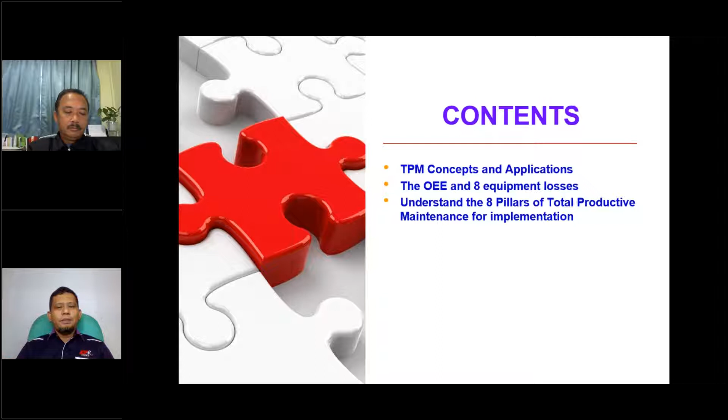Right. So in total productive maintenance, we have the keywords here. The first keyword is total. What is total? Later we're going to share about total involvement. When we use the word maintenance, the common problem is people will think, oh, there's a maintenance department. This is the technician's work. This is the maintenance engineer's work.

So actually, based on a story shared with me by a retired army man. He served in the army in the early 80s, and even my uncle worked in the army since the 1960s. But in the 1960s maybe they didn't meet the Gen Y, 1990s Gen Y, dia tak jumpa mungkin millennial. But one of my friends who started in the army in the 80s managed to meet some of the millennials and Gen Y before he retired.

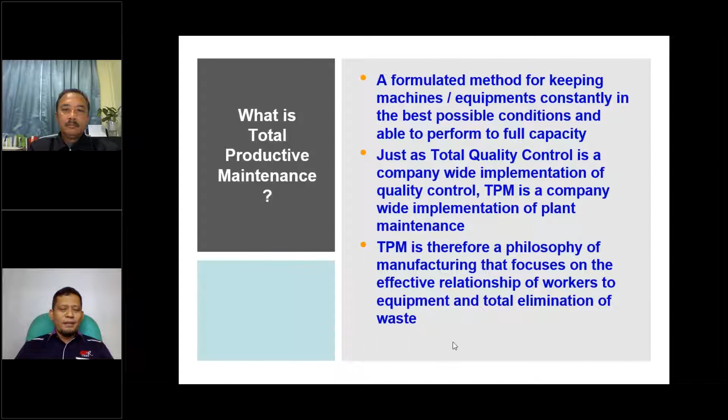So sometimes we must have a feeling for the equipment. When we love the equipment, it will work best for you. But if you hate it, you start kicking your machine and so on, then you have a bad relationship. Actually, the equipment and machinery also have feelings. So if you don't take care of them, they're not going to take care of you. Then your equipment will not be efficient. So a bit of history: it was basically introduced in Japan in 1971.

It is actually introduced by this Seiichi Nakajima. But the Japan Institute of Plant Maintenance was already there in 1969. At that time, JIPM found that preventive maintenance is quite good. But like I mentioned, if we didn't give the ownership to the operator and so on, sometimes the preventive maintenance cannot achieve the target.

So actually it grew from the start, people reacting to the breakdown. For example, we have a car, we just drive aggressively without maintaining it. So what happened? Hopefully it doesn't happen to us.

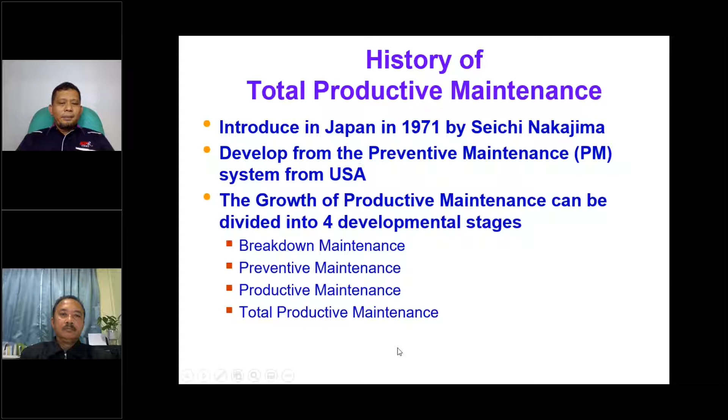This productive maintenance means the maintenance is linked with the performance of the organization, the production, and the quality. So it's the evolution of productive maintenance. And the final stage is total productive maintenance. For total productive maintenance, maintenance and management of equipment are set up as a system. All levels of employees are involved, from top management to the operator.

So we can see the difference between breakdown maintenance, preventive maintenance, productive maintenance, and total productive maintenance. Most of the companies that I audit basically have these two: breakdown maintenance and preventive maintenance, normally called PM. Some companies call it CM, corrective maintenance. So when a machine is down, they do the corrective action to make sure the machine is up. This is quite common.

But total productive maintenance, even though it's 50 years old, especially in SMEs, small medium enterprises, it's actually much easier to implement TPM. However, I find a lack of effort to ensure total productive maintenance. At a small chemical plant, not the big plant, for most technical things the boss repairs the machine and the boss also runs the machine. So that's why I say it's much easier. But he also has to consider how to ensure his operators can do the maintenance as well.

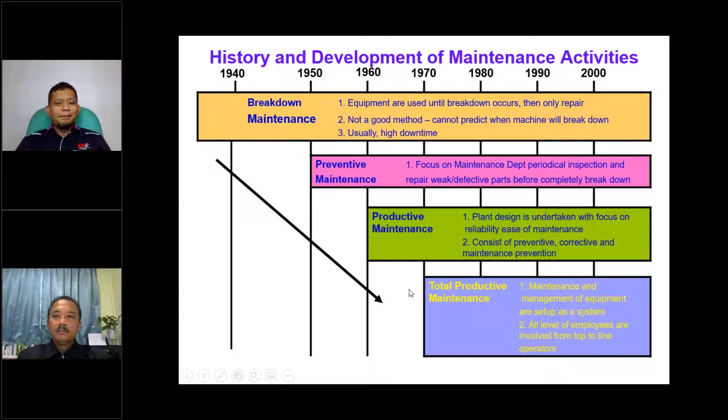So the total means total effectiveness, total maintenance system, including preventive maintenance and maintainability. In other words, total here means that before we buy a piece of equipment, we already consider the maintenance. There's one pillar I will talk about later, early equipment management. Sometimes the problem is when the salesman comes, they say their equipment can do this and that. But after you install it, in a few months it breaks down, and nobody knows how to repair it or troubleshoot it. That's why total productive maintenance also includes

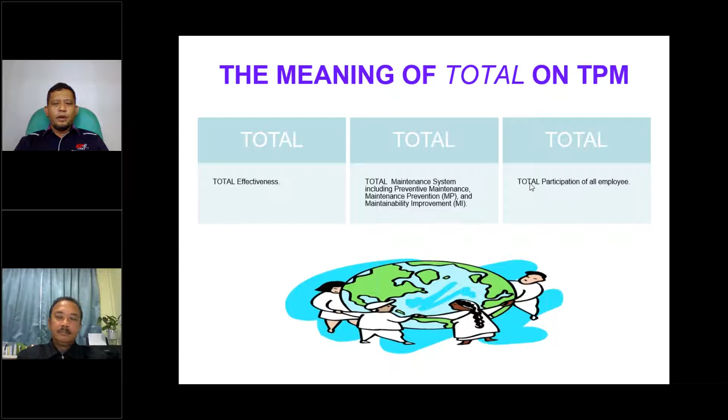early equipment management. I think in Malaysia this is quite true, especially when people want to buy a car. Before people buy a car, they ask, is this car easy to maintain? Are spare parts cheap or not? So that mentality also needs to be integrated into buying equipment, machinery, and so on. And then of course the total participation from the employees.

So let's talk about a simple case study here. We consider a big organization, but the name of the company and the people we keep anonymous. This plant already started investing a lot in full automation, especially nowadays. There are a lot of grants to do IR 4.0, so a lot of automation can be done, the Internet of Things. So the company started investing and received some grants from the government.

And then the quality of the product, the mixing of the product, is all controlled using the PLC. The quality of the chemical depends on the mixer's capability in maintaining process stability. Their plant is fully automatic with a PLC system.

Okay, the ratio is all automatic mix. The chemical A, chemical B, and then they put in the water. The additive is all automatic. The mixing time, setting up the pressure, setting up the temperature is all automatic. And then, of course, the final product cannot be measured if it's in the reactor, in the blending machine.

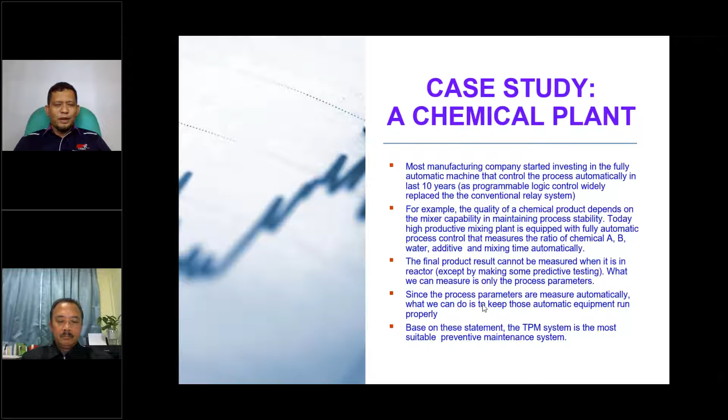But what is the pressure now? I say it's supposed to be inside that meter, but it cannot display. Okay, so that's why I say, okay, your organization, your plant needs TPM. And based on the observation, okay, so this is not a true story. Next slide. Okay, so this is maybe some chit chat in the canteen.

Okay, we talk with the operator. I ask, okay, what is your work right now? Macam mana kerja, bagus ke? So a bit of summary here. So the name is anonymous, but I put some name like Ali Hantam saje. Okay, Ali Hantam saje.

Okay, Ali operates this bit of kit. When it breaks down, he calls maintenance to repair. So if maintenance comes late, okay, that's good for me. So I can relax in the canteen. So when it's mended, when it's repaired, then I operate back. Okay, that is my job, and it's what I get paid for. Okay, this is some of the mentality of the operator, because he says he's been paid to operate the machine, not to repair the machine, not to troubleshoot.

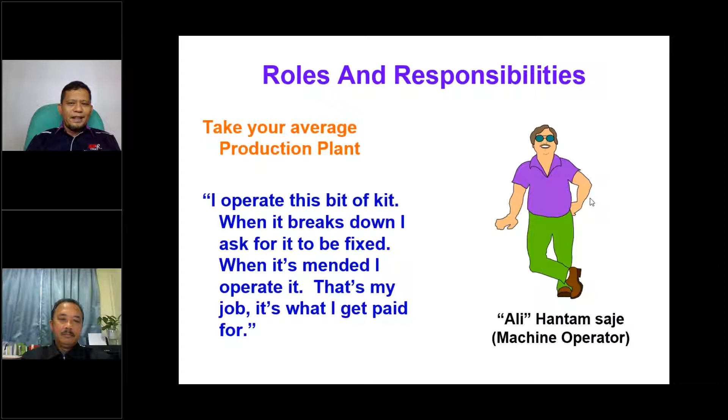Okay, so then we have some chit chat next with the supervisor. If we look from the statement here, it looks like he's a very negative person. He says that I work the operators scared. Got to keep them busy, keep them occupied. This plant keeps breaking down. The maintenance doesn't do the work. They are prima donnas, just sit down in their workshop office, play Facebook, play games.

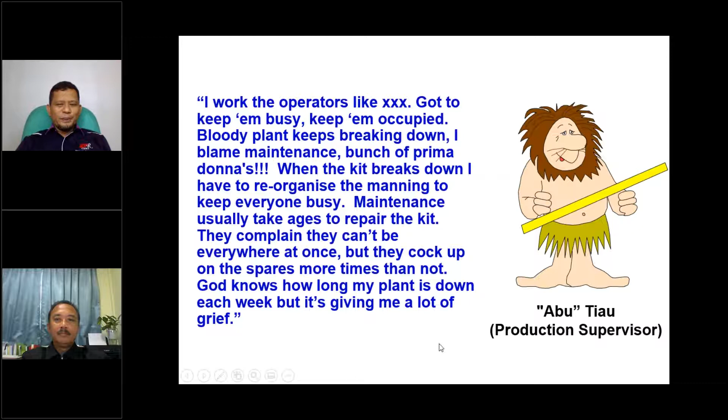Okay, when the kit breaks down, I have to do some reorganization. Some operators run to the canteen, I find them back, and then maintenance usually takes time to repair, so it's really a headache. Sometimes the spare part is not there, but the management keeps pushing us to get the output. So this is Abu Tiau. Kerja dia tiao orang, tiao operator, team operator, and so on. Okay, so this is the supervisor's point of view. And then let's move to the next one.

Alright, so most of the issues when we talk with the maintenance, they say are about the maintenance budget. There is no budget at all sometimes in the organization, and sometimes there is a budget, but always when they want to request it, they cannot get it. And then he said that the plant, the machine is old, and some of the machines look like World War II type of machine. Okay, some of it is really new. But the new ones, the electronics are too complicated.

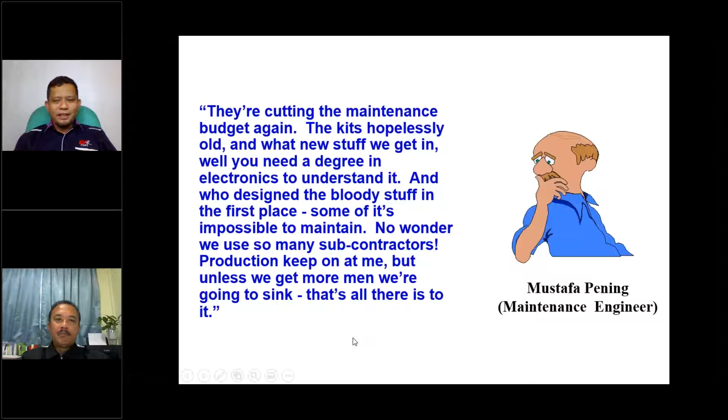Like Mustafa Pening says, we need to have a degree or master's or PhD to understand it. Who designed this machine in the first place? It is like impossible to maintain. If you want to repair it, we have to change the whole bunch. No wonder we use so many subcontractors. Production keeps on at me, but unless we get more men, we're going to sink, and then the plant cannot produce. Right, so this is maintenance engineer Mustafa Pening. Okay, so dah hilang dah rambut dia. Okay, and then we have.

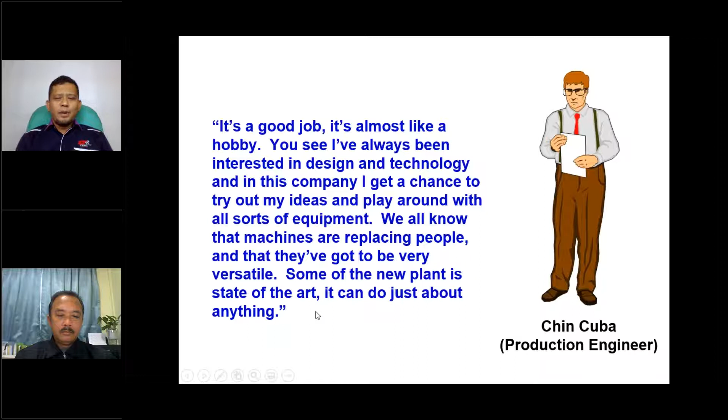Some of the new plant is state of the art. It can do just about anything. Nowadays, with the automatic vehicle machines and so on, there is a lot of that. But the problem is other people, like operators and supervisors, cannot catch up with that.

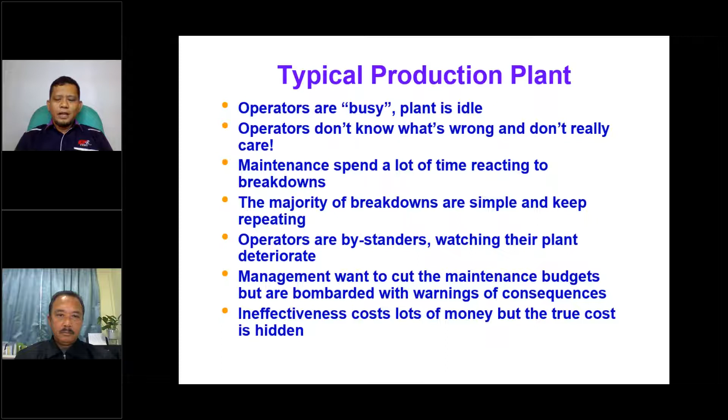So we're going to go to the second chapter, in which we have to measure first. Where are we? Is our plant idle, like the statement from this slide? Your plant is producing the product as it's supposed to produce, right? So we can use one of the quite famous measurements. We call it OEE. OEE is a measurement that I can consider total. Why? Because the measurement considers availability.

Availability is uptime. For example, if you work 24 hours, how long is your machine or your plant running? If of 24 hours it runs around 22 hours, the availability is 22 hours. But if you have a problem of breakdowns and so on, the availability will be reduced. This is the first performance that we're going to measure: whether your machine is producing the product, or is it standing still, or is it broken down, waiting for spare parts, or waiting to be set up. So this is the first measurement.

The second measurement is on the performance. Sometimes when the machine already has wear and tear, there is a tendency that we're going to slow it down. Suppose it's supposed to produce 1 ton of product in 1 day, but you have to slow it down, so it only produces 800 kilograms. So this is the second measurement. But the problem is whether this 800 kilograms can be used or sold, or you have to rework it. So we're going to measure the yield.

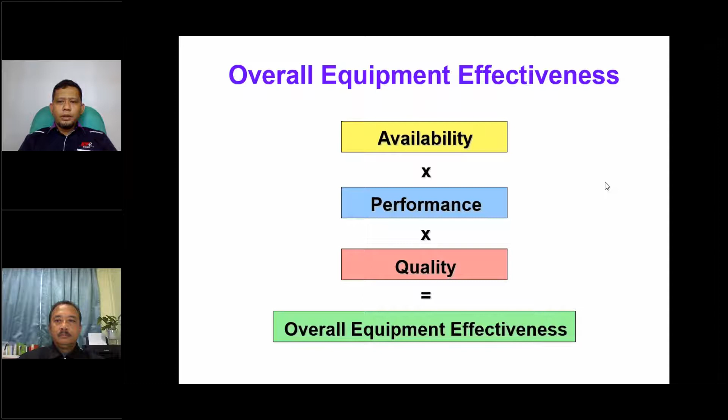So overall, we consider the 3 factors. Number 1 is A, availability. Number 2 is the performance, and number 3 is the quality. We can measure all these 3 and then multiply them, so it becomes overall equipment effectiveness. Let's look at the example on the next slide. On the next slide we talk about 8 big losses, but let me show the example first.

So on this part, planned operating time. We take as an example 1 shift. In 1 shift, they plan to run 8 hours. If they run 8 hours, they are supposed to produce 1,000 liters, or sometimes 1 ton, 1,000 kilos. Availability: they have 2 hours of downtime, so it only runs 6 hours. Instead of 1,000, it only produces 750. So you lost 250 there.

And then performance. Because the machine cannot be run at optimum, it only runs at 80% speed and not 100% speed. At 80% speed they're supposed to get 750 liters, but in actual production they only get 600 liters. So they already lost 400 liters.

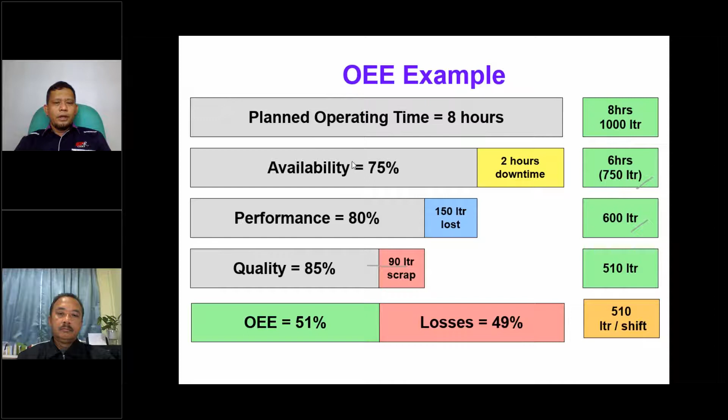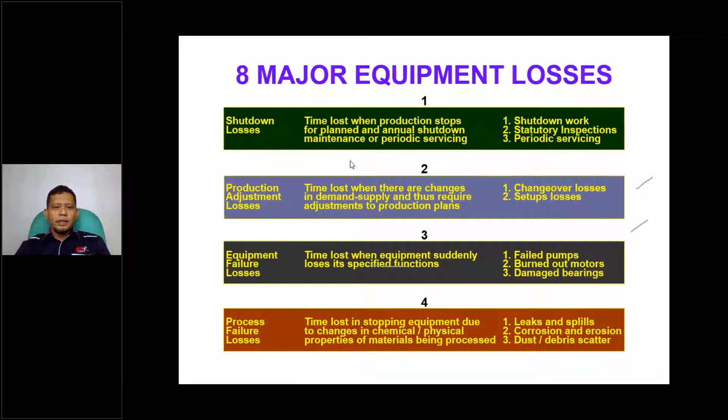Where does all this loss come from? It comes from availability losses, and then we lost in terms of performance, and we lost in terms of quality. So that's why the previous slide basically shows the example of the losses. If you look at the example of losses inside here, shutdown is one of them. Production adjustment.

This one is normally setup losses, because the longer the time you set up, because you have to do the charging of the chemical and so on, that is also considered loss. It's supposed to run 8 hours, but you set up 2 hours, so actually you already lost 2 hours production time. 2 hours from our previous case study is almost 250 liters of product.

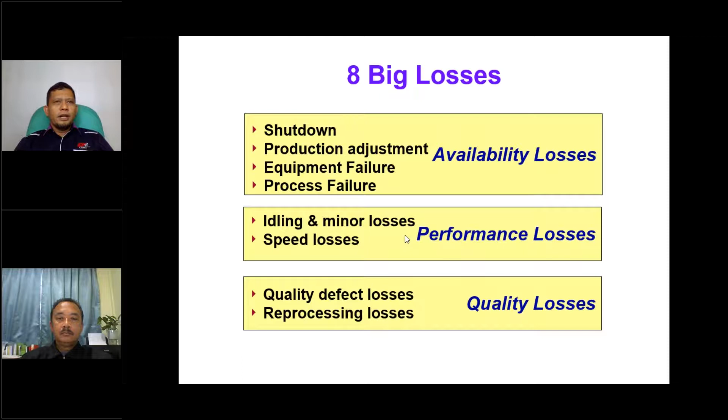And then equipment failure, process failure. These are the 4 losses in availability. Performance losses are idling and minor losses. Sometimes we already operate the machine, but we have to slow it down because there's some issue. For example, in the dilution, we have to put some chemical or some water to dilute it, but the problem is that the nozzle is stuck. So instead of pouring fast, now we have to pour it a little bit slow, charge a bit slow. So idling and minor losses are considered performance losses.

And then quality defect losses. We always consider here the first time quality. If you have to rework, that is considered quality losses. First time quality means the measurement: first time we produce 1,000 liters, but after that only 500 liters can be used. Another 500 liters you have to send for rework. So that is actually quality losses, right?

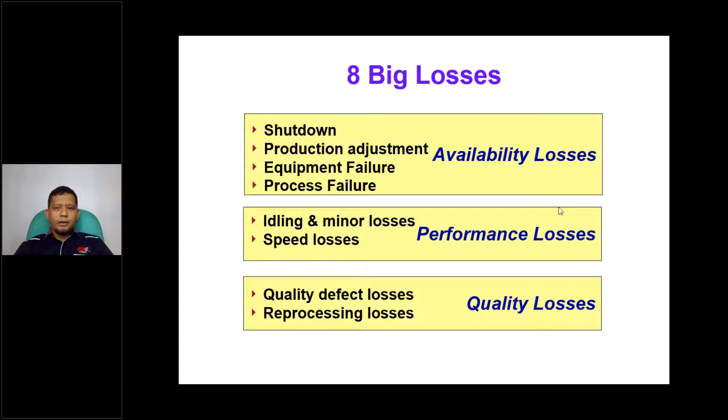So on this availability and performance losses, if you measure it, here is the calculation. Availability is 75%; when you want to calculate, it is 0.75. Then you times 0.8 because of performance losses, and then quality, times 0.85. If you times all these three, it becomes 0.51. Then you times 100, then you get the OEE.

If your OEE is 51%, it means you lost 49%. If your OEE is 70%, you lost 30%. If your OEE is 95%, then you only lost 5% in terms of downtime, quality, and performance. So some people ask me, what is the best OEE? Actually, there is no right and wrong answer, because it depends on what your baseline measurement is first.

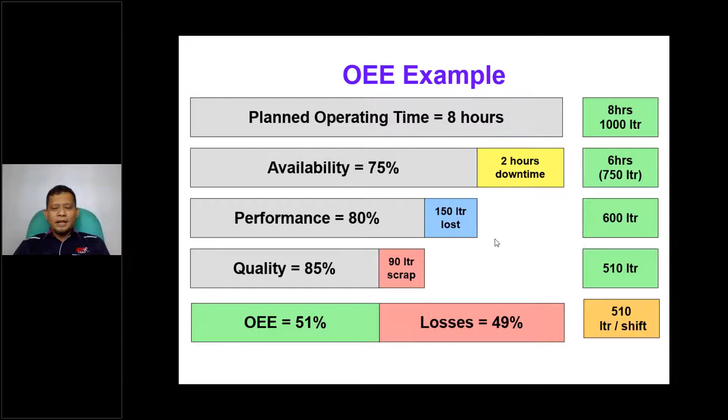If your baseline measurement including the setup time, the downtime, and so on is already more than 85, you should set a little bit higher, maybe 92% or 95% OEE. But to be honest, when I visit chemical plants, for most plants even getting 85% is not that easy. Most of their losses are on the downtime. If you measure it daily, maybe you can see good results, but suddenly the plant has a problem, it stops for 3 days, and in that month the performance will be down.

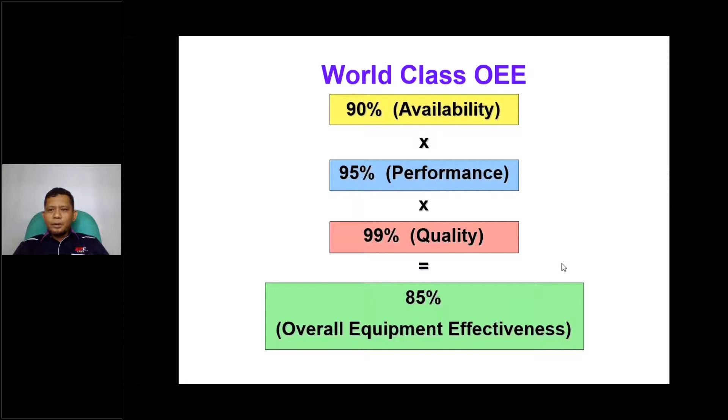So basically that is what we call the performance of world-class OEE. It should be 85%. If you got 50 or 40, don't worry, because that is quite common. 40, 50, 60 is quite common in most chemical plants. Then try to improve to 85. So we move to the next one.

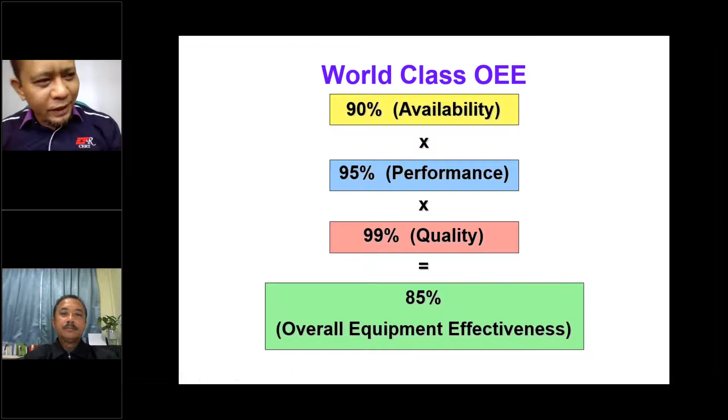The final part of this is the 8 pillars of TPM that I'd like to share. But before that, since I've been talking almost 40 minutes, anything you'd like to share, because the final part is quite short? Okay, so far so good.

Just maybe for the benefit of the audience, you mentioned the OEE, overall equipment effectiveness. Could you share whether an industry without any equipment or machinery can still use TPM as well? Without equipment and machinery. Normally we measure it by the equipment, plant, or machinery, and what we prefer is one line. For example, if the process consists of chemical reaction, then dilution and then blending, if we can measure it in one line, that is even better.

But some companies find it difficult because after the reaction they don't do the dilution immediately. They keep it first and do the dilution the next day and so on. But if it's a continuous process, we prefer it until the end because we need to measure the output. In performance we measure the output, and in quality we measure the quality output. If we cannot measure the output at the end of the process, I think the OEE cannot be measured. So it needs to be equipment, because it talks about downtime and availability.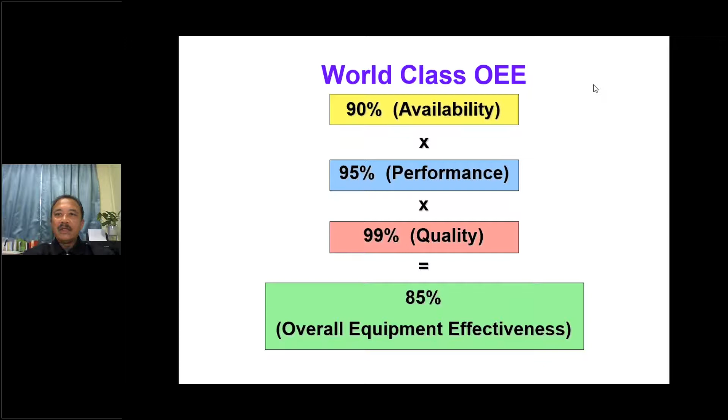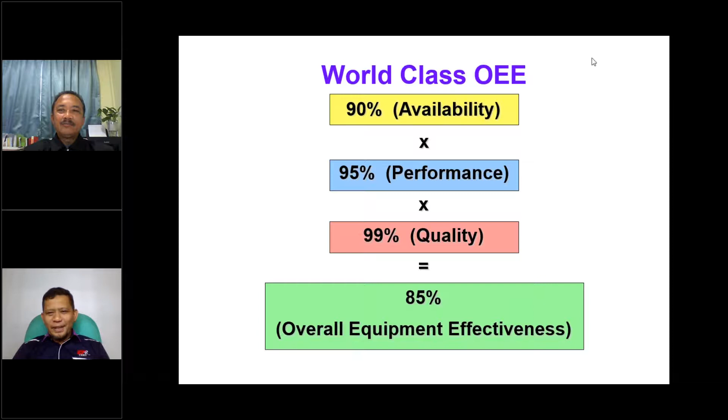Video means my sharing? No, your own face. Did I miss? Yeah, okay. I think it's automatically off. Maybe internet problem, they use less streaming maybe. Okay, thank you. All right, thank you for the reminder. That's good.

Okay, so the 8 pillars of TPM. This is actually taken from the JIPM. Some literature may have different points, but I find that these 8 should be sufficient. This afternoon, I will share; I have about 14 points. In the assessment, for example, I include budget and budgeting, the financial, in the assessment of your plant maintenance. Some people say budget is under efficient administration.

Right, so it's okay. And then I also include the repair facilities, the workshop. In these 8 pillars, actually, I didn't mention the workshop, the repair facilities. But again, I put it under efficient administration, to consider as workshop efficiency, because sometimes in the chemical plant workshop, their 5S is really bad. They cannot find their spare parts and so on. So we can consider that under pillar number 7.

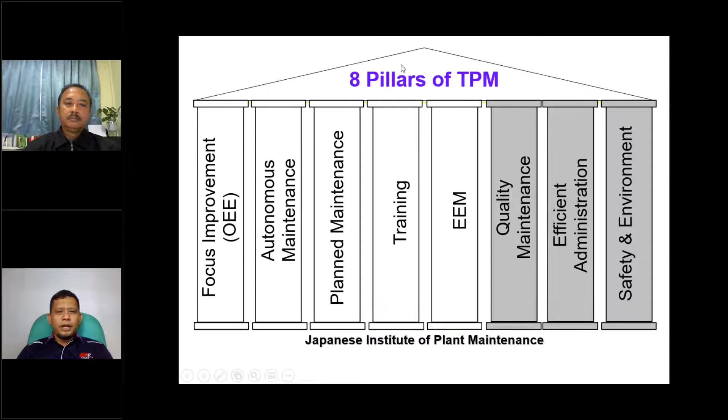Right. So in the slide, basically I have a simple explanation of these 8 pillars, which build your TPM, your house of plant maintenance, because each pillar will ensure that your roof, which means your quality of product, your OEE, is maintained well. So focused improvement, like I mentioned, is Kaizen activity in your plant maintenance.

If you don't have that, later in the afternoon when we talk about assessment, maybe you have less score in this. If you have activities but not documented, you also get less score, because some companies, especially maintenance engineers and technicians, are quite weak in documentation. In chemical plants, I found they are not strong in preparing reports. Some even tell me, I work with the spanner, not with the pen. So it's a bit hard to tell them to document their improvements. At least document the before and after.

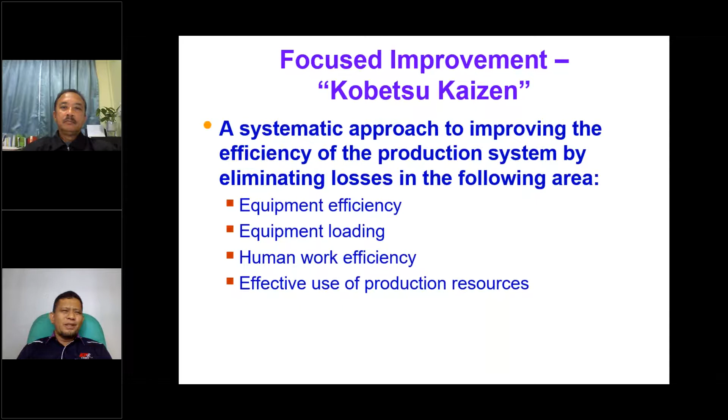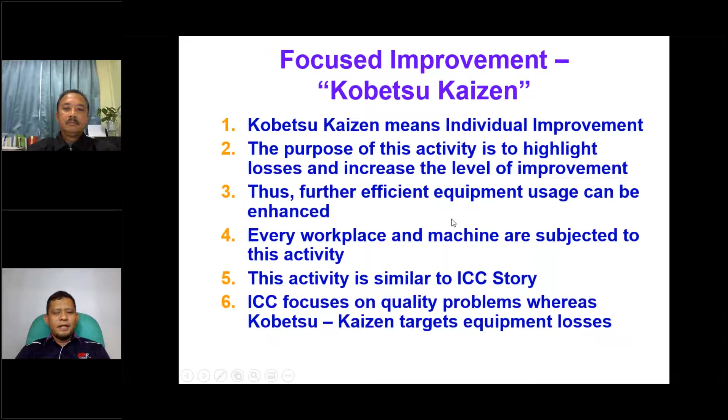Okay, Kobetsu Kaizen. Again, that's the first pillar. You must have this activity. Okay, second, you must have the autonomous maintenance.

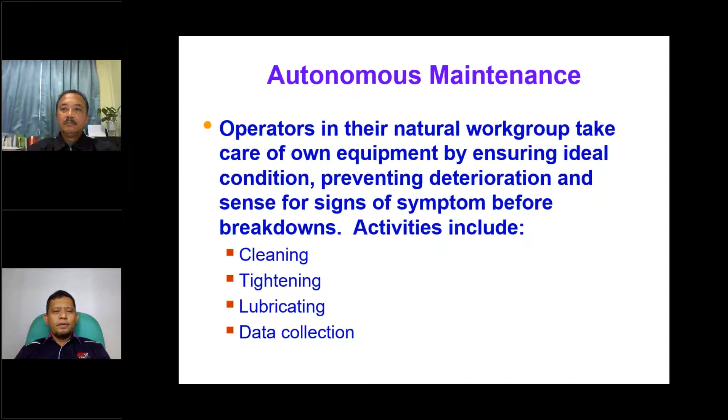Which is, we need to do the cleaning, we need to do the tightening on certain bolts and nuts, because the machine is running, there's a potential it loosens. You need to do some lubricating, you need to do some data collection. That needs to be done by those who are in front of the machine. And then the next one is planned maintenance or preventive maintenance.

So this planned maintenance is to increase the mean time between failure, in which we need to specify the activity by ranking the machine or the plant. So which one is important is machine type A, so you need more preventive maintenance. And there's machine type B, maybe it's less maintenance. And then C,

even sometimes some people use run until fail. For example, our light bulb, we seldom do preventive maintenance or change it before its failure, because we know that changing it is very fast. Even if one light bulb is down, it may not affect the production or the output. So that may be C ranking or D ranking type of equipment or machinery.

And then another important one under this planned maintenance is CBM, or condition-based monitoring. With condition-based, we're going to measure, for example, the vibration. Because we know once the motor bearing has a problem, it will vibrate badly. Before this it vibrates, but not badly, but when the bearing starts to wear, it actually gives you a sign.

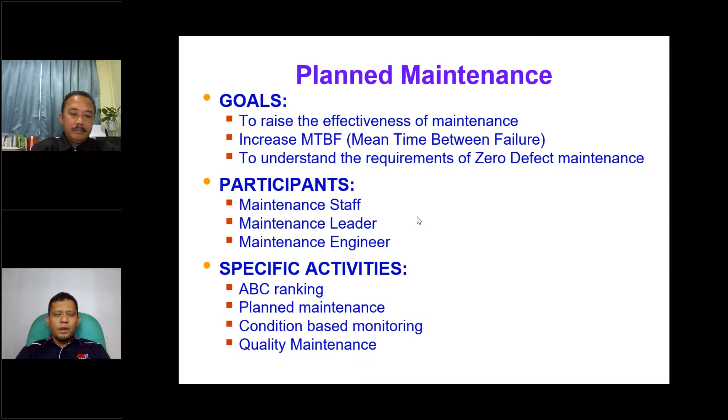If the machine's optimum temperature should be 75, we can check. Suddenly it's too hot, maybe it's 90. That is considered a potential problem with your equipment or machine. Right. So this is planned maintenance, condition-based monitoring. Oil sampling also can be considered condition-based monitoring.

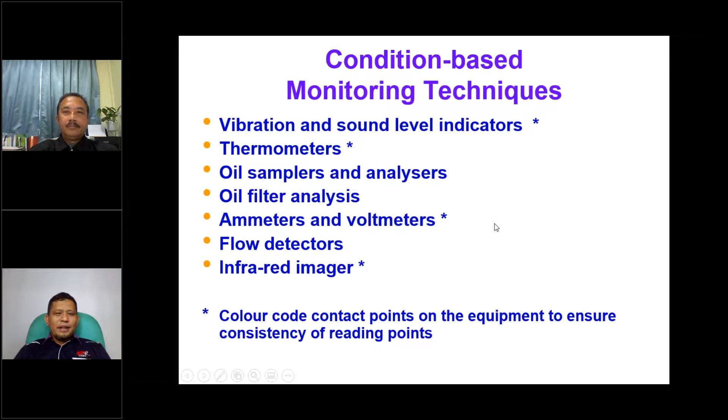Meter: suddenly the voltage or the current is getting higher, there's potentially more friction. And then infrared imager and so on. Infrared imager is also quite famous now. In some shopping complexes we can see our temperature by using this infrared imager. So this is something that can improve your OEE.

And then training and education. We have to train our operators, our technicians, maintenance engineers on new things, especially nowadays when we want to embark on IR 4.0. We need organizational readiness. Your people are ready. Your people know how to use a smartphone, for example.

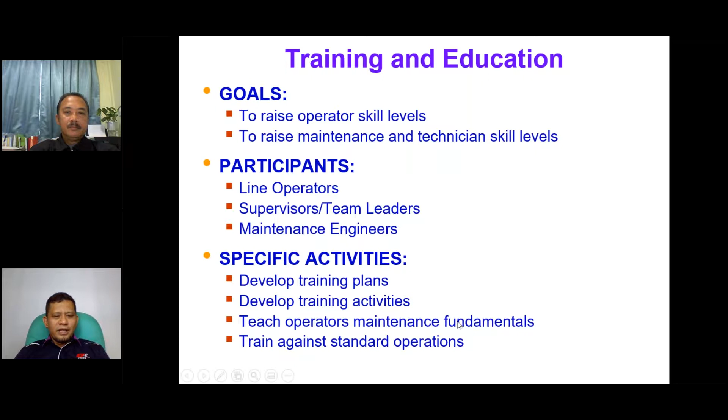But nowadays it's okay because smartphones are used for MySejahtera. So awareness of using the smartphone extends to people 60, 70 years old. Pakcik-makcik also now can use the smartphone. So you need to develop a training plan and training activities to get this TPM working. Like I mentioned, this is one of the important parts:

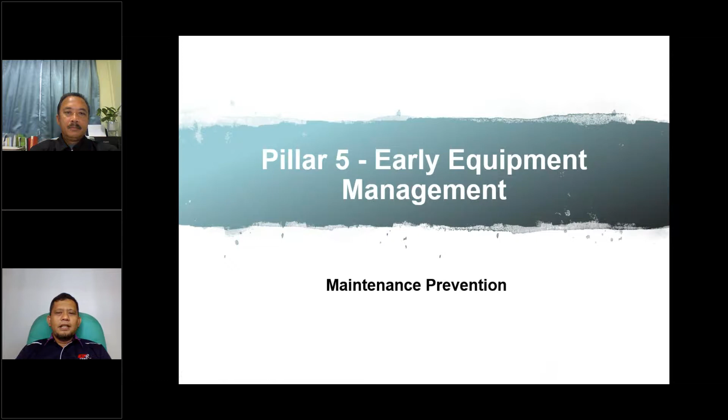early equipment management. When I visit some plants, I ask, who decided to buy this motor? Who decided to buy this pump? Who decided to use that reactor, blending? They said the boss. Who is the boss? Actually it's our CEO, our managing director. Did he involve any technical guy or not? No, he just discussed with the contractor, with the supplier.

Then when is maintenance involved? Once the plant has been installed, then they give it to us. That is too late already, right? So the decision to install, to buy new equipment, a new pump, a new machine, needs the involvement of production and also maintenance.

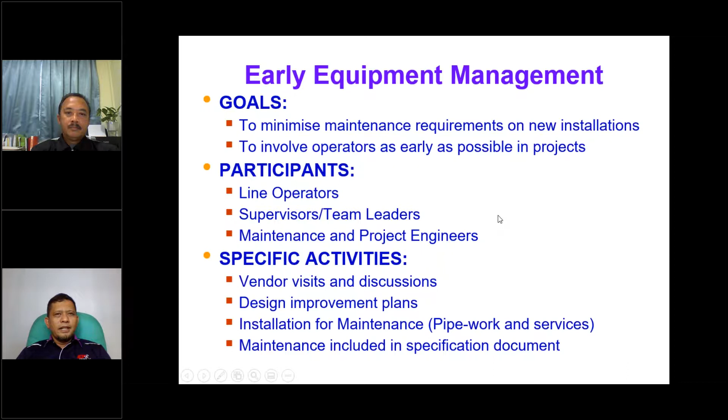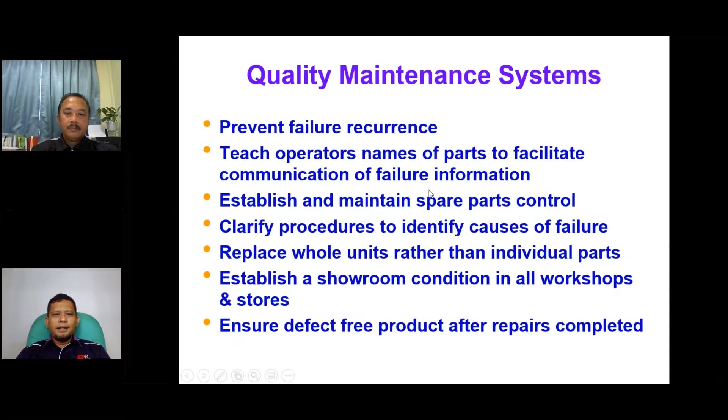Then I discuss a few questions; there are a few checklists that need to be filled in. If the score is high, then we proceed to buy the equipment. If not, we should find an alternative, because it's better to be difficult early rather than during mass production. Pillar number 6 is quality maintenance. It's more on the documentation, on the reporting of maintenance activities.

And then the efficient administration is more on the workshop, on the spare part control, on the purchasing side, how to contact the contractors to repair, what type of problem we need to outsource, what is the process that we need to outsource to the contractor to do the preventive maintenance. It is all under efficient administration, including the budgeting.

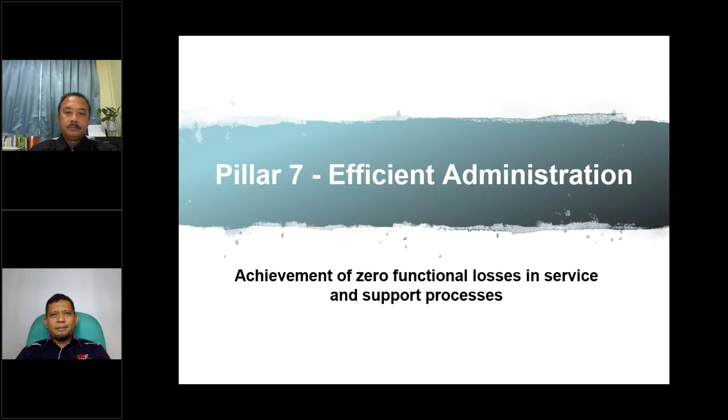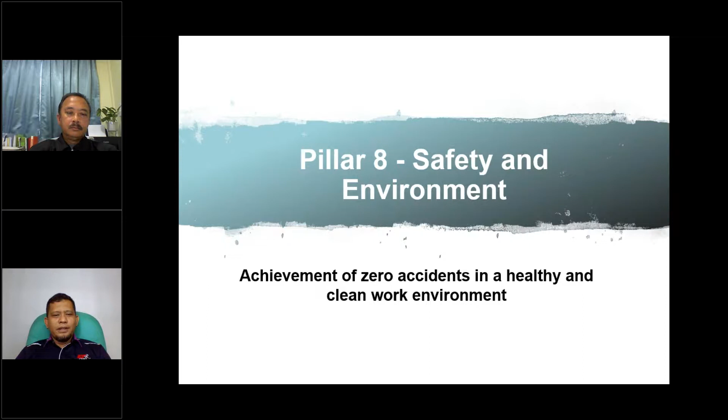Okay, so that's efficient, and then the final part is of course safety and environment: achievement of zero accident in a healthy and clean work environment. Okay, so my final parting line, the benefits of TPM: the target is to have zero failure, zero defects, zero accident in your plant. So that's why we need TPM.

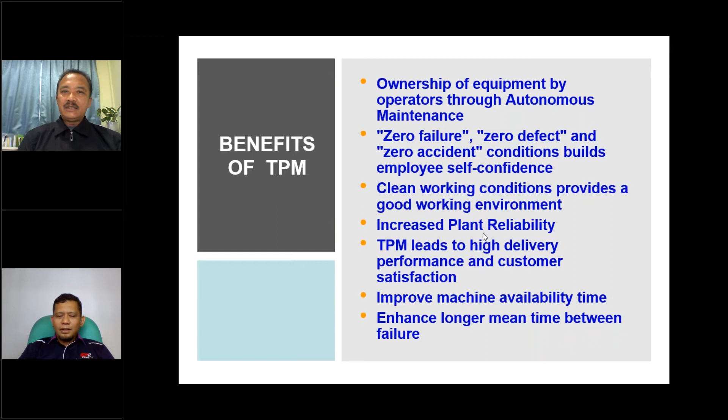And we have covered quite a bit of information as far as TPM in chemical plants. Like I said, this is not only applicable to the chemical industry, but can also be commonly utilized or adopted in other types of industries as well. This is quite a generic methodology for all the other industries. And TPM is one of the tools in lean management, a tool to eliminate waste.